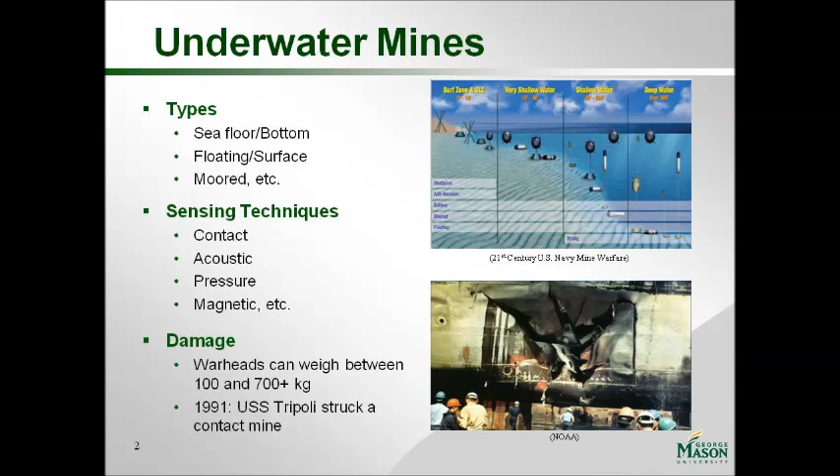Mines can be equipped with various types of sensors made to detonate the mine, and they can also be severely damaging to surface vessels. The picture on the bottom right is the USS Tripoli, which struck a contact mine in the Gulf War in 1991. As you can see, it caused a large amount of damage to the ship.

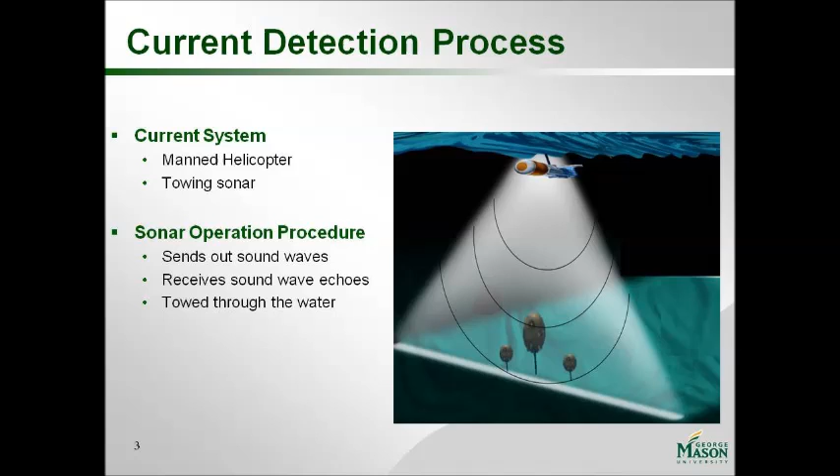Due to the physics of the underwater environment, the best means available today to sense underwater mines is sonar. Sonar sends out sound waves and has a receiver that senses the echoes that come back, and from those returning sound waves it can create a picture of the ocean floor and anything sitting on it. Currently, the Navy uses these sonars by towing them through the water with a manned helicopter.

The sonar equation displays how a sonar either detects or fails to detect an object underwater. The terms in green work in the sonar's favor, and the terms in red work against the sonar. All terms are measures of sound in decibels. In the end, if the signal excess is greater than 0, the sonar has sensed the object. If the signal excess is below 0, the sonar has not detected an object.

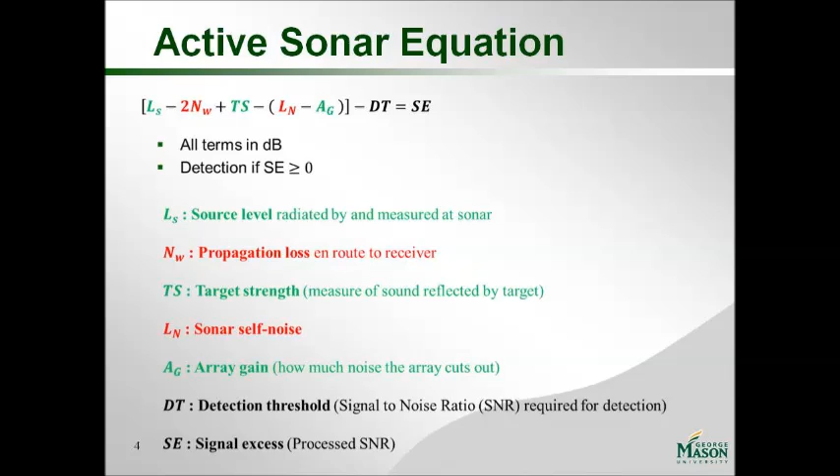According to the Navy, the time required to clear a minefield can be up to 200 times the time required to place the minefield. The cost to lay a minefield can be as low as 0.5% of the cost required to clear the minefield. Therefore, there is a need for the U.S. Navy to improve the effectiveness of its mine clearance systems.

To do this, they must reduce operational cost, increase the rate of detection, and remove the safety risk to its personnel.

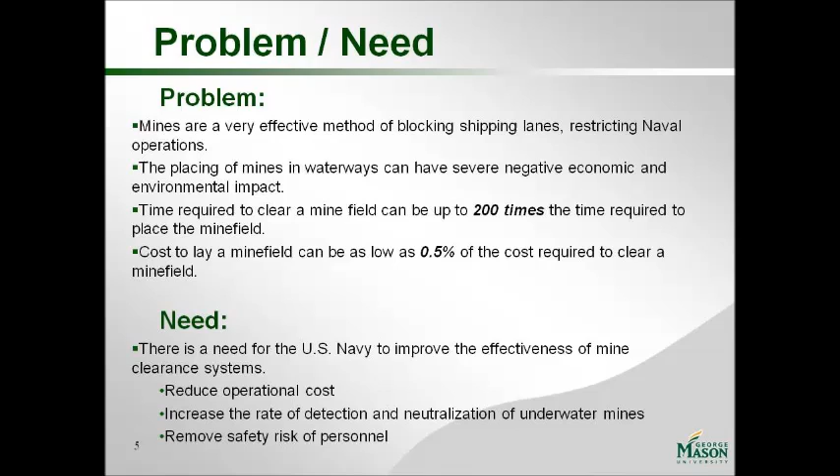To begin the design of a new mine detection system, we came up with 2 sonar alternatives to evaluate. These 2 alternatives vary in size, cost, and capabilities.

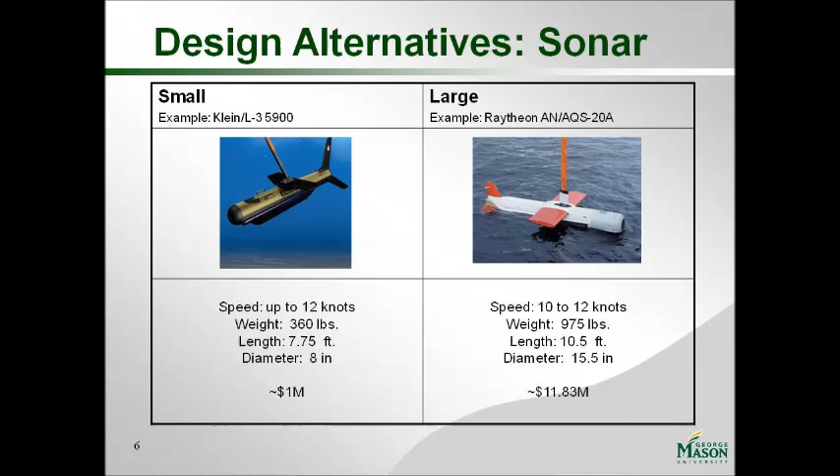We also decided on 5 alternatives to be evaluated for the vehicle portion of the system: 2 air alternatives, 2 surface boat alternatives, and 1 underwater alternative. All 5 of these vehicles are unmanned. They're able to travel pre-programmed routes through the use of their GPS, and they're all able to tow heavy loads.

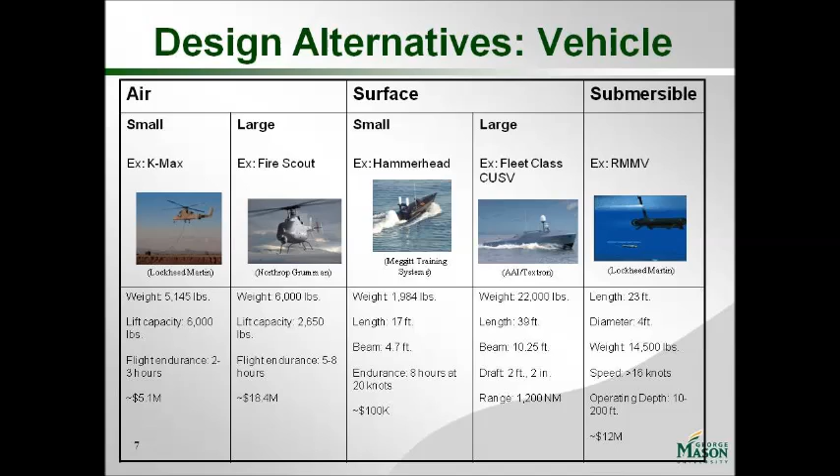This diagram shows the major inputs and outputs to our simulation. The inputs are sonar and vehicle alternatives, search area, and random weather inputs. The outputs are probability of detection, time, and cost. This is all achieved through the use of a probability of detection model and a system dynamics model.

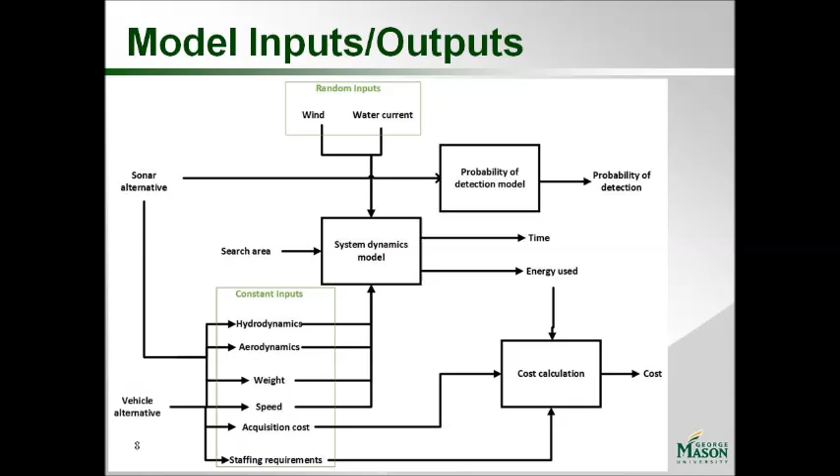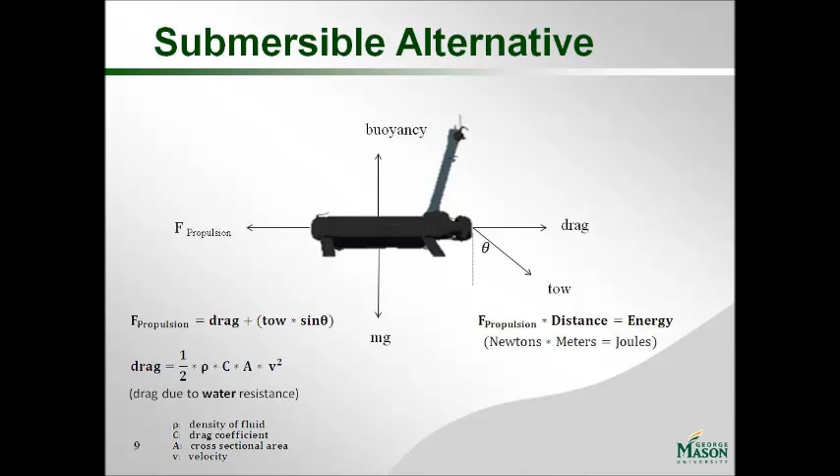This free body diagram shows the forces acting on the underwater alternative as it moves through the water. The main forces it must overcome to move forward are its own drag and the drag of the sonar it is towing behind it. The drag equation and all components of the equation are shown in the bottom left. When that force is determined, it can be multiplied by distance to come up with the total energy used to travel over that distance.

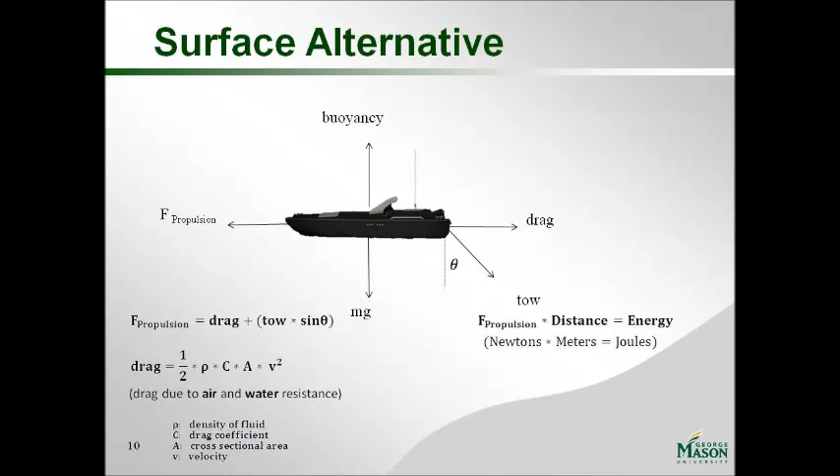The forces acting on the surface alternative are very similar, with the main difference being that drag can be either due to air for the portion of the boat above the surface, or due to water for the portion below the surface. Forces acting on the airborne alternative are different because of the lift required to keep the helicopter in the air.

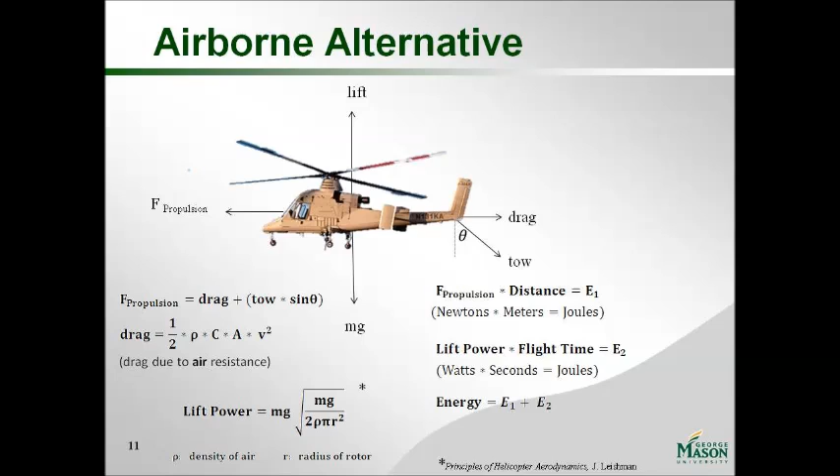The lift equation is shown on the bottom left-hand side. The energy used to keep the helicopter in the air is added to the energy used to propel the helicopter forward to come up with the total energy used. After total energy is calculated, it can be converted to cost by first converting to a volume of fuel using the energy density of the fuel it is using, and then converting volume into cost using fuel prices.

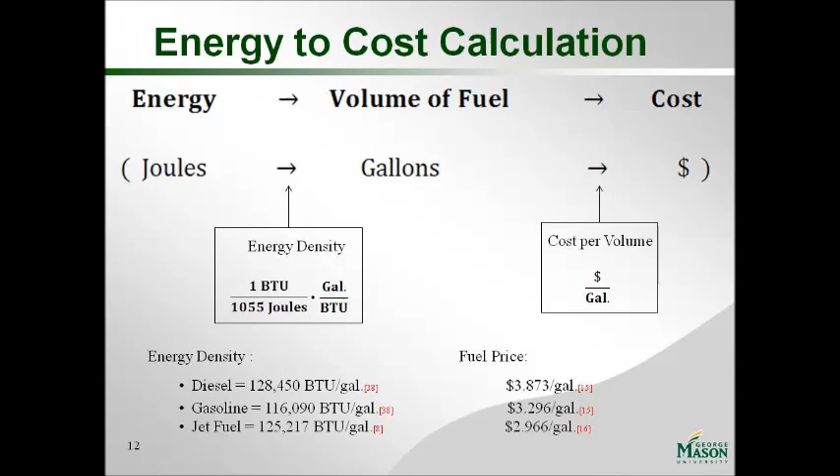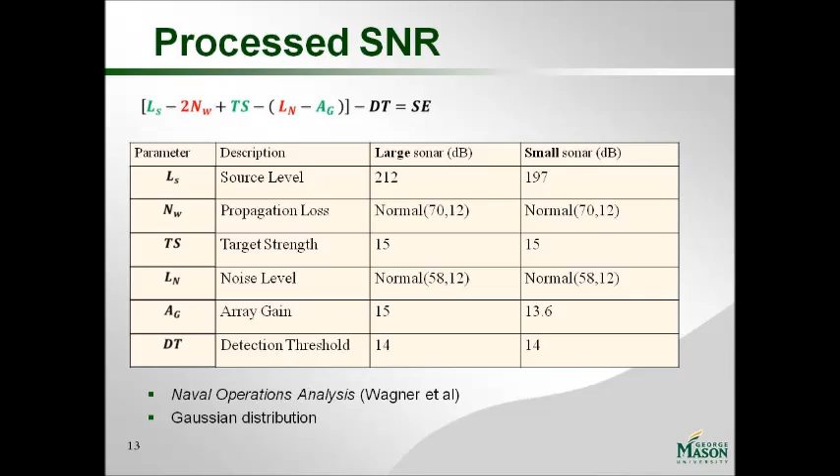Shown here are the input parameters to the probability of detection model based on our two sonar alternatives. The main difference being the source level, which is the volume of the ping put out by each sonar. Propagation loss and noise level are random variables that change depending on the sonar's operating environment.

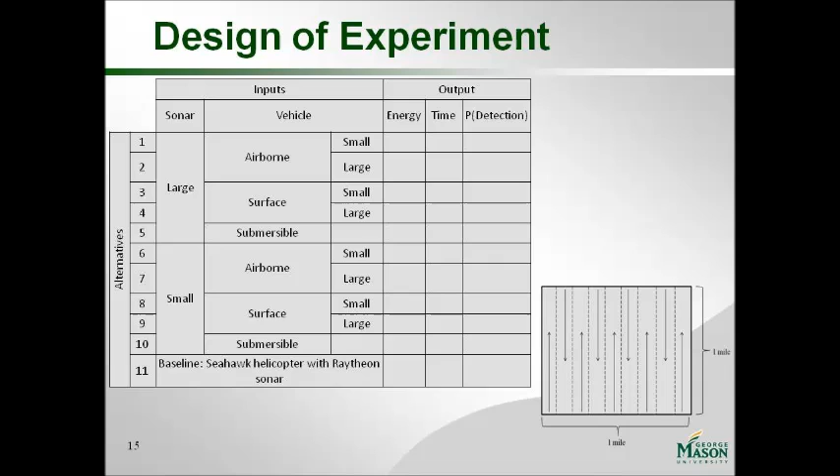Pairing each vehicle alternative with each sonar alternative comes to a total of 10 alternatives to evaluate. The 11th alternative is the current system that the Navy uses. All 11 of these alternatives will be put through our model, traveling in a 1 square mile area in the pattern shown on the bottom right.

This table shows the results of the system dynamics model, which ran all 11 alternatives traveling through the 1 square mile area. The alternative with the best fuel economy is highlighted in yellow, the small sonar paired with the underwater vehicle. The bottom row is the current system the Navy uses, which had by far the worst fuel economy.

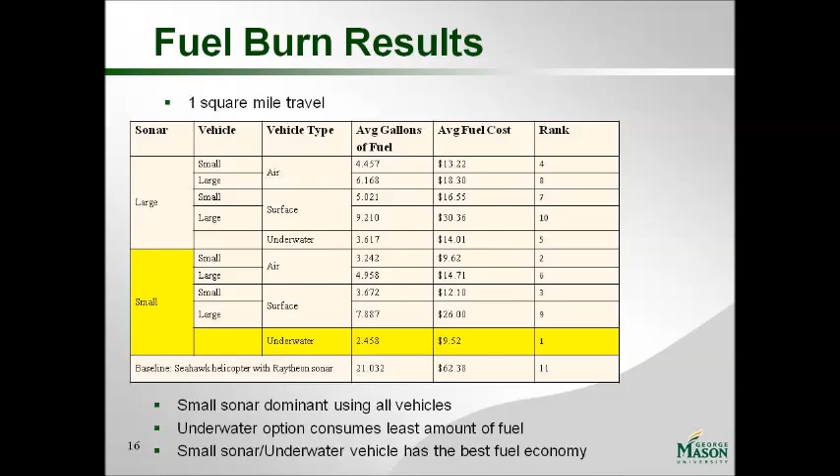The diagram on top shows the results of the probability of detection model. The large sonar, shown in green, had an average process signal-to-noise ratio of 30 decibels, while the small sonar, shown in yellow, had an average of 13 decibels. These average process signal-to-noise ratios were used along with the receiver operating characteristic curves at the bottom to derive the probability of detection of 0.998 for the large sonar and 0.82 for the small sonar.

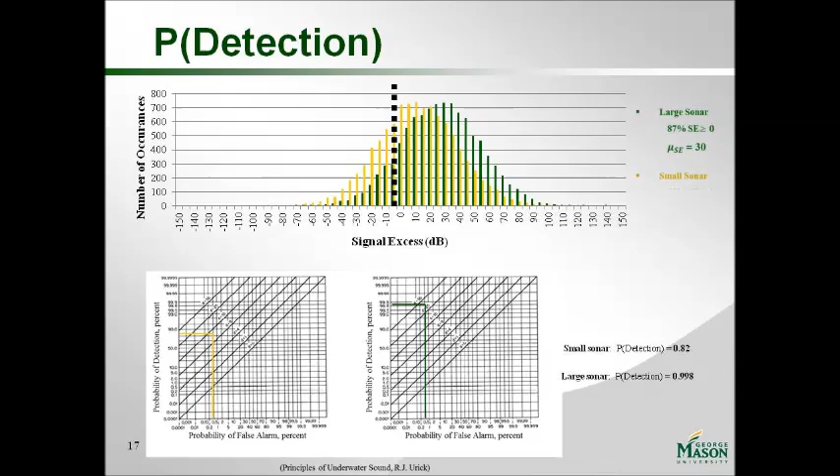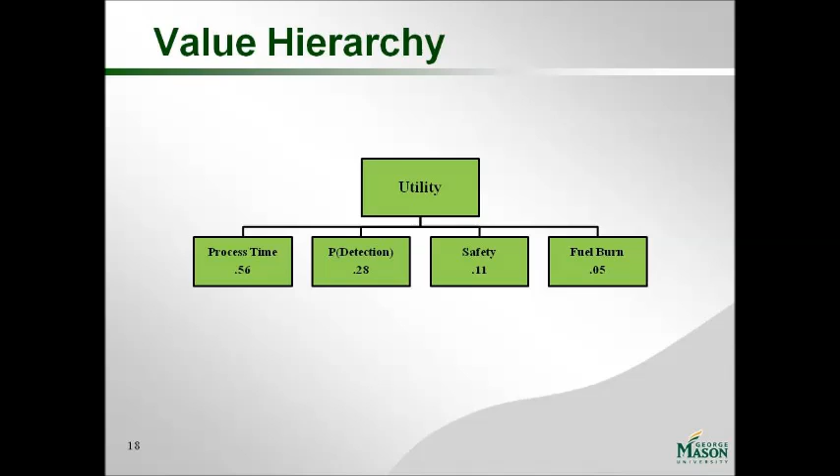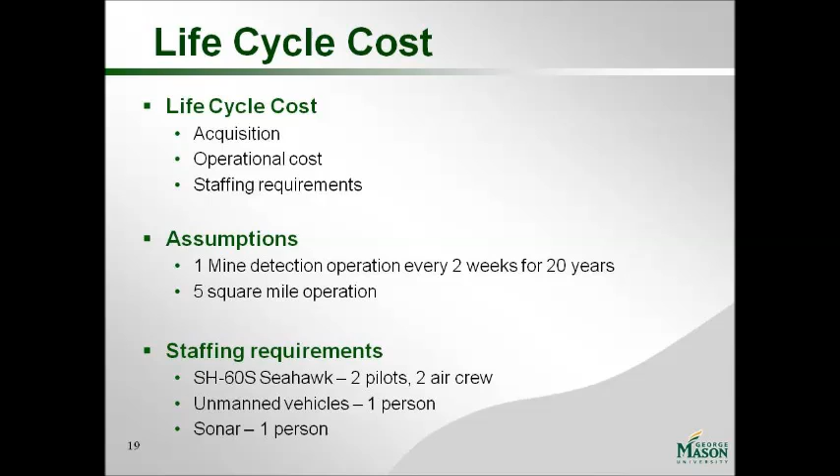Lifecycle costs for each alternative was calculated by adding up acquisition costs, operational costs, and staffing costs. Because the Navy does not publish how often they perform different operations, an assumption had to be made. Also shown are staffing requirements for operation of different alternatives.

Plotting the total utility versus cost for all alternatives revealed two clear preferred alternatives circled in green, the top being the large sonar paired with the small boat, and the bottom left the small sonar with the small boat. Looking at these two alternatives together, we noticed a high difference in cost and a small difference in utility, which led us to the question,

can we take the small sonar with the small boat and, because of its low cost, use multiple units at once to try to raise the total utility?

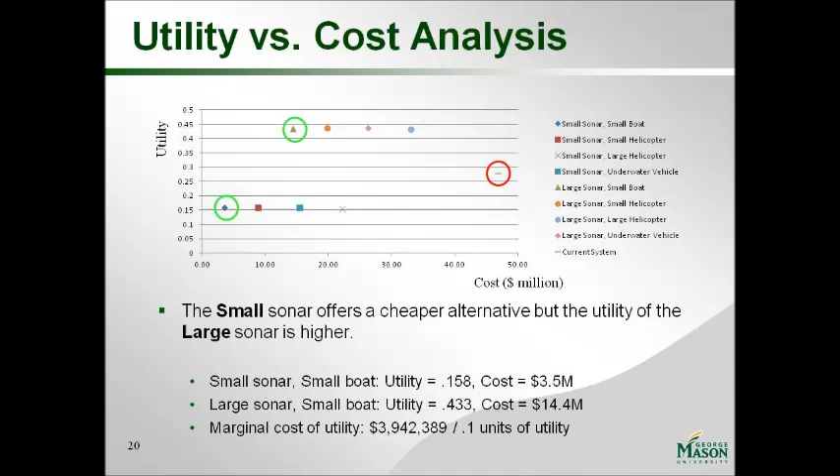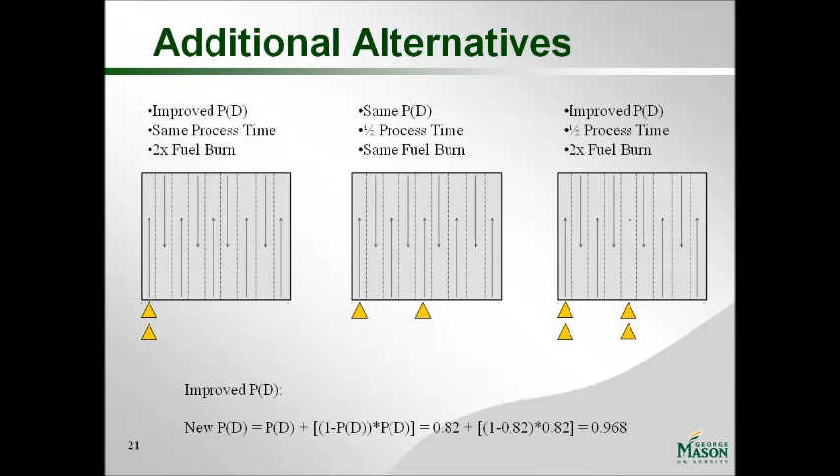This thought process led to the addition of 3 new alternatives to evaluate, all using the small sonar, small boat combination. Starting from the left, the first unit travels its pattern with the second unit directly behind it, increasing the probability of detection. The second new alternative is both units covering the 5 square mile area simultaneously, each cutting the area in half for the other. And the last new alternative on the right combines both options together, increasing probability of detection and reducing time while using 4 units simultaneously.

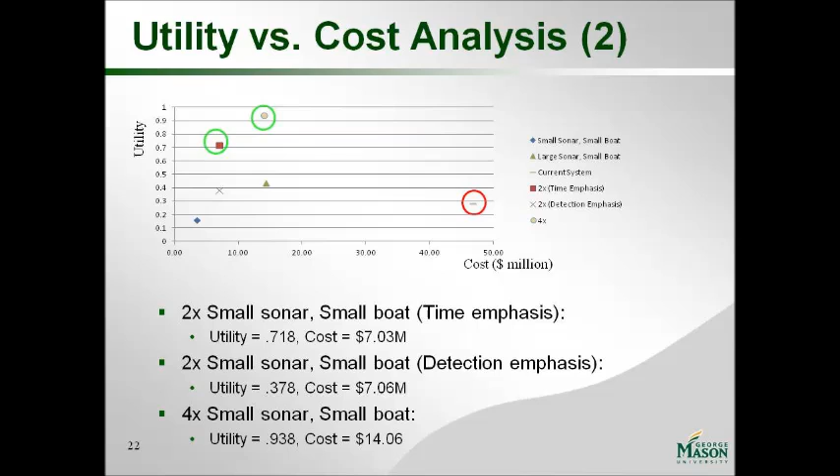Plotting the 3 new alternatives with the 2 previous preferred alternatives and the current baseline system reveals 2 new preferred alternatives, those being the 4 units of the small boat, small sonar combination, and the 2 units of the small sonar, small boat combination traveling in the time emphasis pattern.

Our final recommendation brings 2 choices to the decision maker, either the 2-unit small sonar, small boat combination, which brings the lower cost, or the 4-unit small sonar, small boat combination, which brings a higher utility.